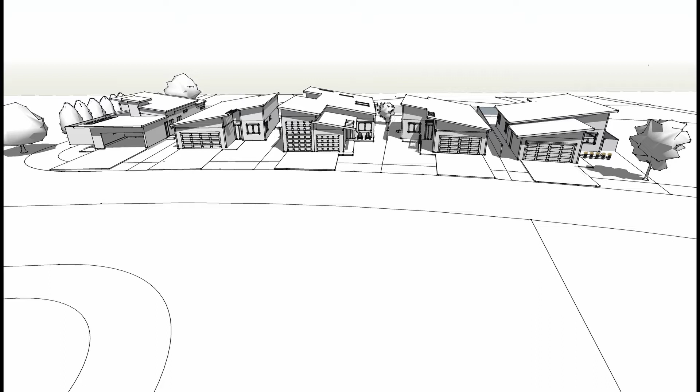But basically, with narrow lots like these, the garage is always going to be a very prominent design feature. There's no way to really get around having a big, large, bulky garage in the front of the house. So I want to try to use that to my advantage and create a deny and reward situation where the garage actually masks the front entrance and creates what I'm calling an external foyer.

So you are denied sight of the front door until you approach on foot, and it is revealed to you as you sort of turn the corner, and each one will have something a little different and compelling about it that makes that long walk up the side of the garage sort of like an external long hallway or foyer.

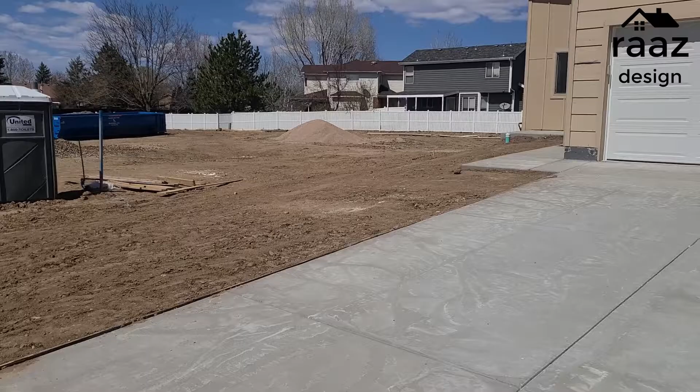So the first one we actually used rough sawn cedar timbers that mark your pathway down, evenly spaced, and also create some cool shadows on the side of the garage and are visible from the home office as well. And at night, the soffit lights also create some cool effects and shadows that, again, give you that exterior foyer feel. So each house will have that.

And on the peak floor plan, we went with roof lights, which are essentially cutouts in the soffit. And so here you can see I'm being denied the exterior foyer, and as I turn the corner, I'll start to get this cool effect right here with these shadows that are marking my line up perfectly for the front door. Of course, that was just random chance that we were filming at that exact moment.

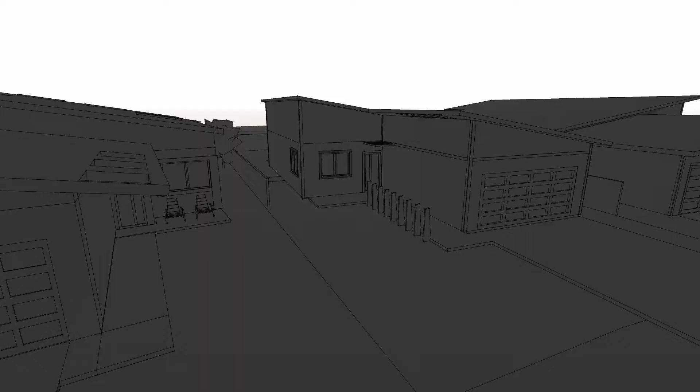But they also reveal the sky when you look up, and they draw your eye up and give you that sort of compelling entrance. And those shadows will sort of march across the garden and the front patio throughout the course of the day. And they also will move throughout the course of the year. So they weren't just sort of arbitrarily placed, they serve a function.

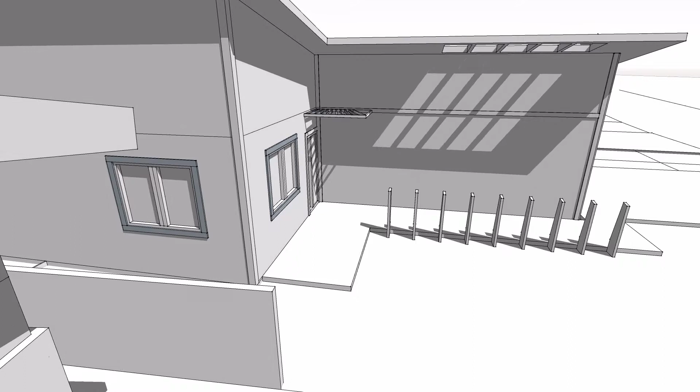So in the winter, when the sun is low, it will allow more light to penetrate to the main section of the house. And in the summer, when the sun is high, it keeps the sun off. And so that's sort of a passive control of solar heat gain on the home. So you get a little bit more heat in the winter and a little bit less in the summer.

And in this case, they're not particularly huge, but they are still serving that function, maybe 70-30 aesthetics to function. And it's pretty simple and easy to figure that out as long as you know the latitude of where you're building. And it can come in handy when you want to, say, put some shades or an overhang over a south-facing window like you're seeing there. You can angle it and size it appropriately to create the desired effect.

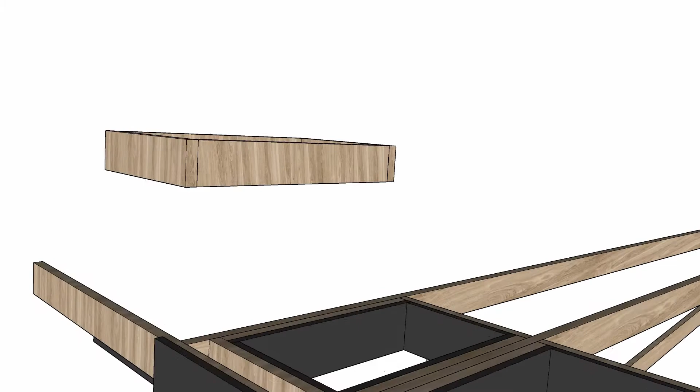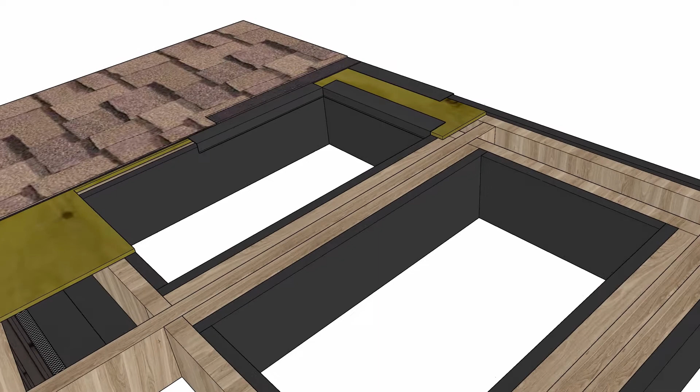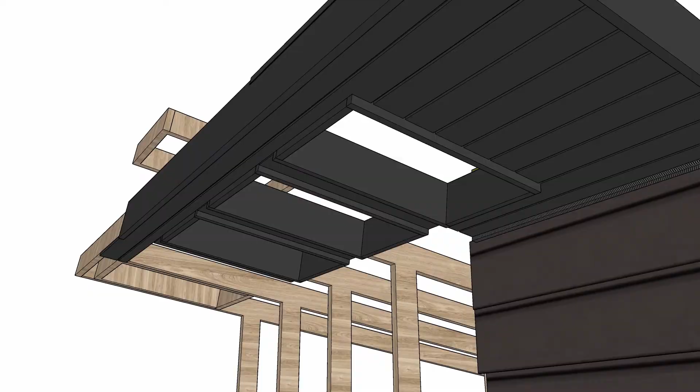They're also easy to build. All you have to do is box out some 2x6s and then line them up in between the top chords of a regular truss. And then you trim it out with your fascia material and your drip edge. All your roof layers and corners and everything remain the same. There's no special techniques, and it's cost effective, and in fact doesn't really cost you anything, but adds a really cool architectural feature to the house.

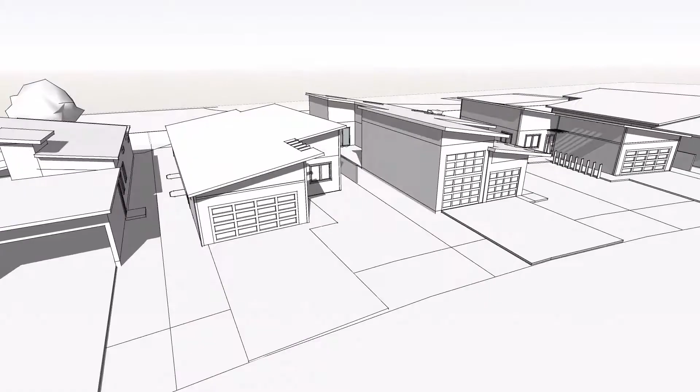And here we're just doing a quick flyby to show some of the different versions of the same idea we're going to implement over the remaining houses. All have the same desired effect of creating that exterior foyer and some cool light play and shadow play. And I think they turned out pretty awesome. Hopefully I'm not the only one who thinks that, but I think they look really cool, and they take what could have been a negative of the design and really improve it.

So hopefully that taught you something, and hopefully you like it. And next video, we're going to go through the floor plan in the same way as this video and talk about different design decisions and why we did what we did.